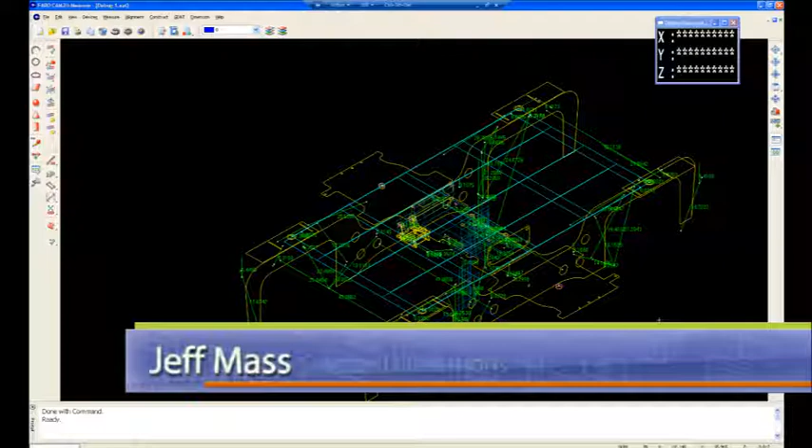I'll go through and show you this module here, this SAT file in 4.0 that I've done some measurement to, and I wanted to set the weights on the alignment because the original alignment that I used, I did not set the weights. I just did an iterative alignment to the A datums, which are all up-down pads, similar to this one here, and then the B datums, there were 4 of those which solved for fore aft, which were these flat planes here. Each one of those legs had a fore aft stop on it.

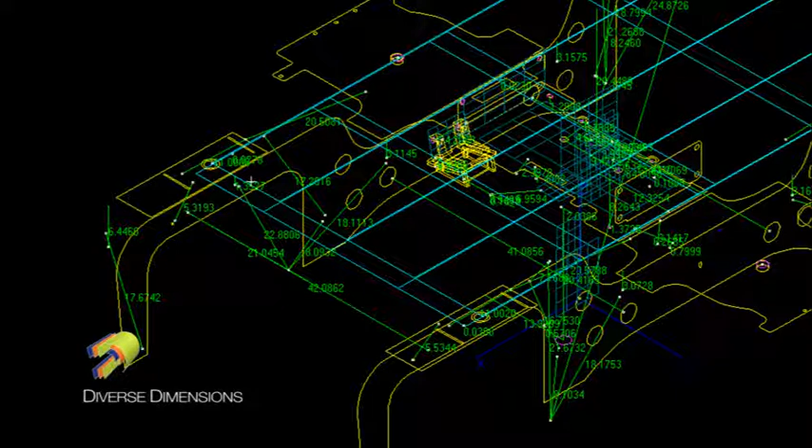And then what I had was a hole and a slot that was known as a C datum. So there was a C hole and a C slot. So the original iterative alignment, all of those datum features were just allowed to best fit as good as they could. But then my client said, no, I'd like to pin that in my fixture between the hole and the slot, which are, I'll do a plan view here.

I will zoom in on the hole area here. That would be up in here. And then R to regenerate. See how that hole is a little bit misaligned from the nominal datum hole, which is the yellow. So the measured would be the feature up here that's in purple. And then I'll show you the slot as well. If I go down to this side here and down a little bit, here's the slot. And you can see that's misaligned as well.

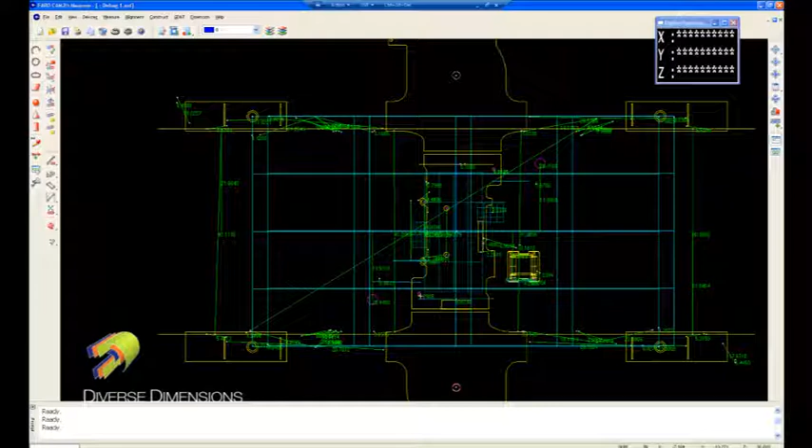Okay, well there's some conflict on the datums here. If I zoom out a little bit, if I'm looking at all the datums best fitting, it's truly not pinning in my C datums. I've got a conflict with the B datums, which also solve for this Y component, or for this fore aft component here. So I've got a conflict in the datums. So if my client truly wants that to be aligned to the C datum hole for fore aft and for cross car, and then the C datum slot for just cross car, well, I can easily do that by setting the weights on that iterative alignment.

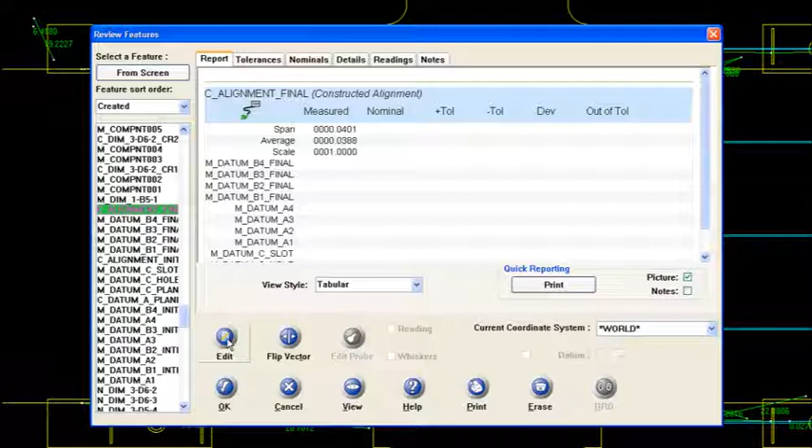And since I've got an alignment out there right now, I will go to the review features. I've got a lot of content in that model, a lot of dimensions and some other measured features. So I will go down and I'll find the alignment. The final alignment is what I was using here as my current alignment. What I can do is I can go and edit that alignment. You can see the features highlighted that I've been using here to solve for that alignment.

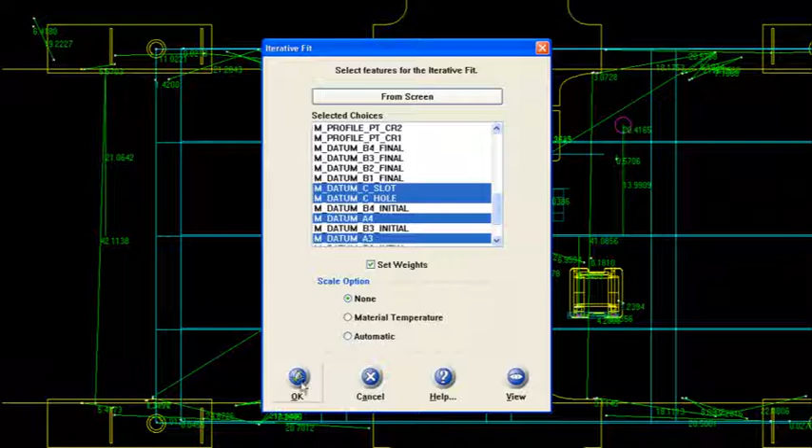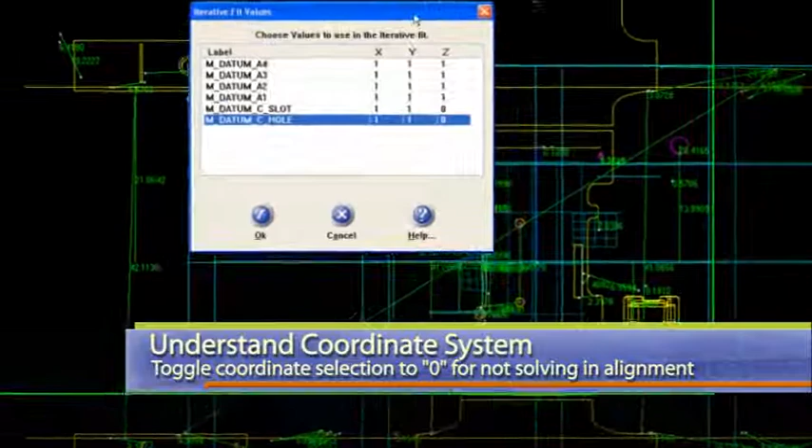Let me zoom out just a little bit, or just move this aside just a little bit. Now it's tough to see, but here's the Y component that's going to solve me this way. And then right here inside of this area, that dimension's kind of covering it up, but there's an X in there. So my X is side to side, or cross car here. So Z component, I don't want the hole and the slot to solve me there. Only the A datums will solve me there.

But now, the C hole I want to solve me for fore aft and for cross car. That makes sense to keep those both at 1. But then the slot, I only want it to solve for cross car. I only want that, not the Y component. So I'll deselect the Y component there.

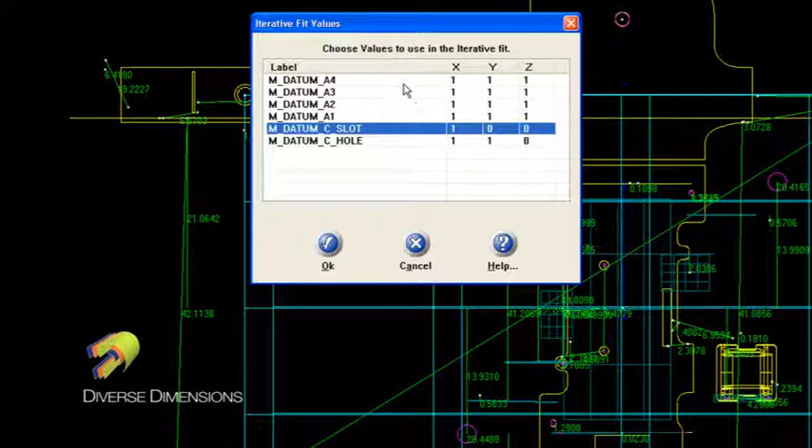Now, notice one thing here is, inside of CAM2, I cannot deselect any other features here. Since these were measured as surface points, I'm trying to double click all over and I'm not getting any change there. So since it's a surface point going to a surface patch, it will find that patch and solve it for whatever component that patch is created as. So I'm not too worried about that. But I definitely want the hole and the slot to solve me for cross car, and I want the hole to solve me for the fore aft. Okay, let's say okay to that and let it resolve.

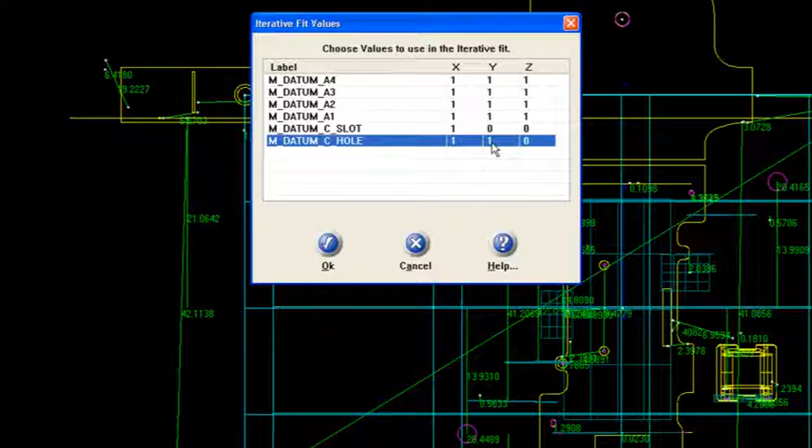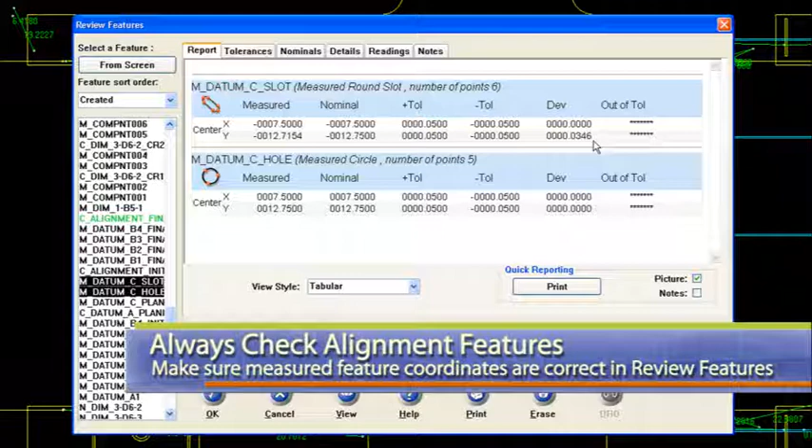And then what I'll do is I'll go back down to my hole and my slot. Now, notice what happens here is my hole is now truly set to 0, as if I was pinning it in a gauge. And then my slot deviation is 0 here for the X component, but it's allowed to float in the Y. So if you need to dictate or set the weights on any of your components, say if you're pinning it in a gauge, this is the way to do it. Just go back to the iterative alignment and set the weights. Or in this case, since I've got that alignment out there, I can just take it here in Review Features and edit and set those weights.